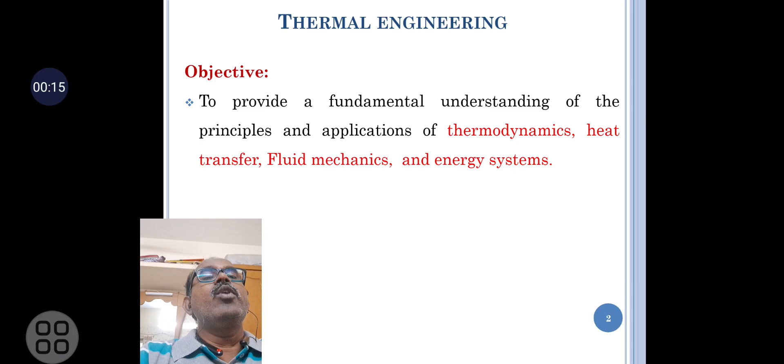The objectives of thermal engineering are to provide the fundamental understanding of the principles and applications of thermodynamics, heat transfer, fluid mechanics, and energy systems.

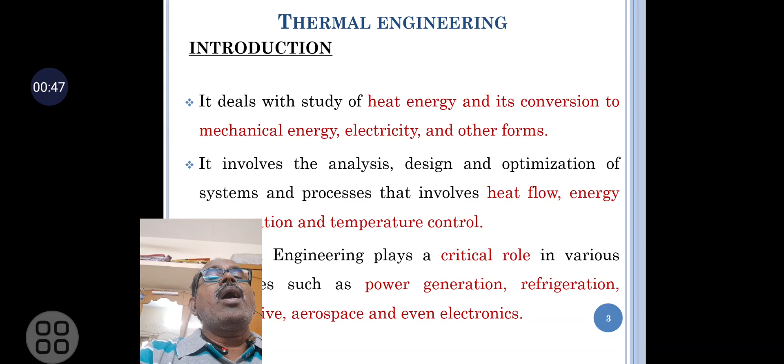An introduction to this subject: it deals with the study of heat energy and its conversion to mechanical, electrical, and other forms of energy. It involves the analysis, design, and optimization of systems and processes involving heat flow, energy conservation, and temperature control. Thermal engineering plays a critical role in various industries such as power generation, refrigeration, automotive, aerospace, and electronics.

The key principles and concepts: the first law of thermodynamics explains the conservation of energy, that energy cannot be created or destroyed, only transformed from one form to another. The second law of thermodynamics explains that heat energy naturally flows from a hotter body to a cooler body, and the entropy of an isolated system tends to increase over time.

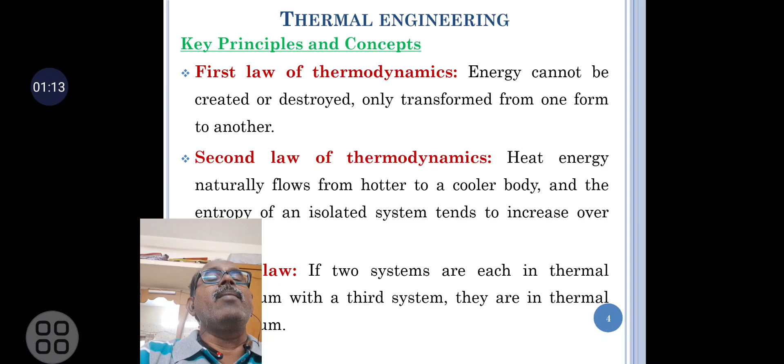Applications of thermal engineering include power plants, where thermal engineering principles are used to design steam and gas turbines, optimize boiler efficiency, and improve waste heat recovery. Also automotive engineering, in cooling systems of vehicles.

Exhaust heat recovery systems, and aerospace heat management in spacecraft, jet engines, and high-speed vehicles. In the electronics industry, managing heat dissipation in electronic components, computer processors, and LED lights ensures optimal performance.

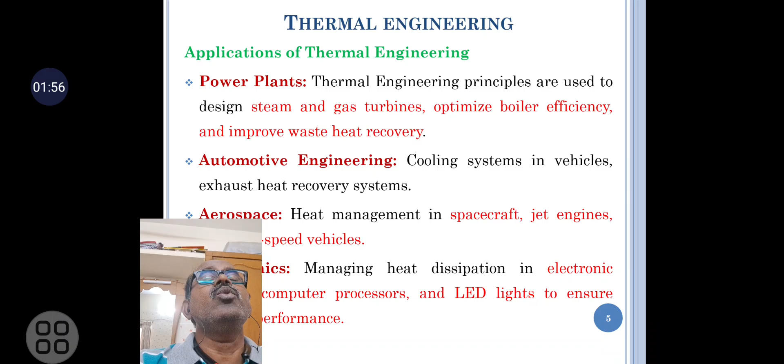Emerging trends in thermal engineering: many research efforts are ongoing in this area. Renewable energy systems such as solar thermal systems, geothermal power, and bioenergy are gaining importance in the context of sustainable energy production.

The government has also taken many steps to develop solar thermal systems. One company, Tata Industries, has invested around 100 crores in solar development systems.

Nanotechnology uses nano materials to improve heat transfer efficiency in thermal systems, like cooling electronics or enhancing heat exchangers, and energy storage.

The development of thermal energy storage systems, such as phase change materials, is used to store excess energy for later use. Thermal battery management systems ensure effective thermal management of batteries and electric motors, increasingly important to ensure performance and safety.

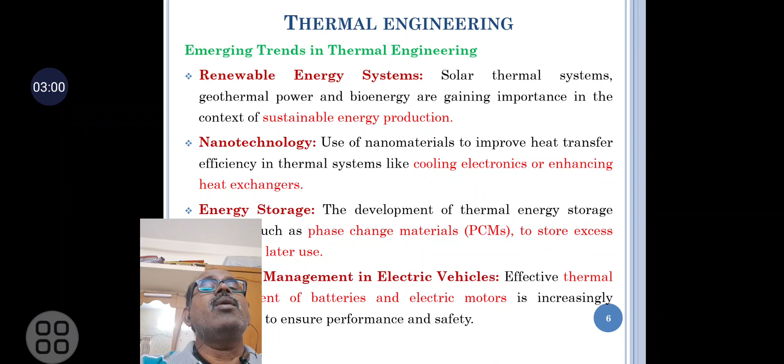In the first unit, we will discuss the air standard cycle. Both spark ignition and compression ignition engines are based on air standard cycles. As air is intaked and heat is also intaked, we get the work output. Next, the heated air is exhausted from the system.

The assumptions of the cycle are: air is used as an ideal working fluid in the cycle, the compression and expansion processes are isentropic, the system is closed, the cycle is a complete thermodynamic cycle, and the specific heats are assumed to be constant at their ambient temperature value.

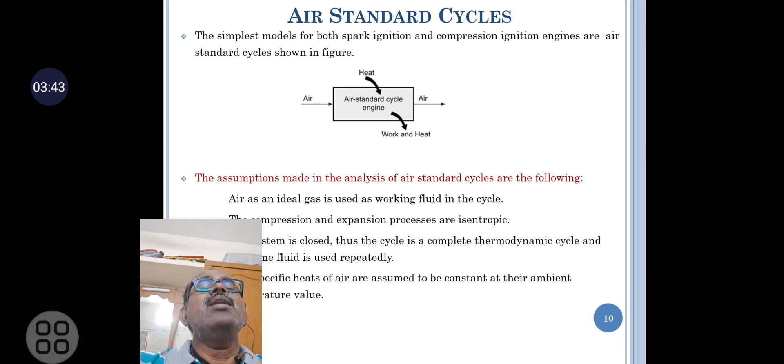First, we will discuss the Otto cycle. The Otto cycle is the ideal standard cycle for spark ignition engines. It was invented by Nikolaus Otto in 1876. The Otto cycle consists of four processes: isentropic compression, constant volume heat addition, isentropic expansion, and constant volume heat rejection.

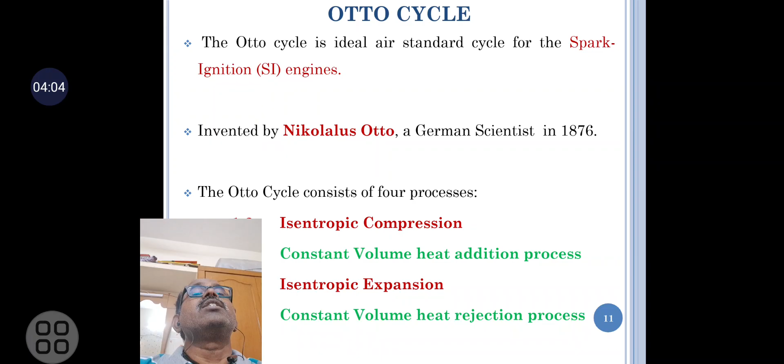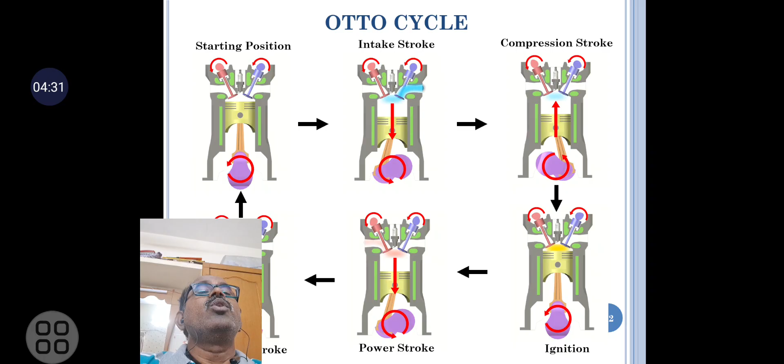In the second stroke, the compression stroke, both valves are closed and the piston moves from BDC to TDC. At the end of the compression stroke, the ignition process takes place, combustion occurs, and pressure and temperature are raised.

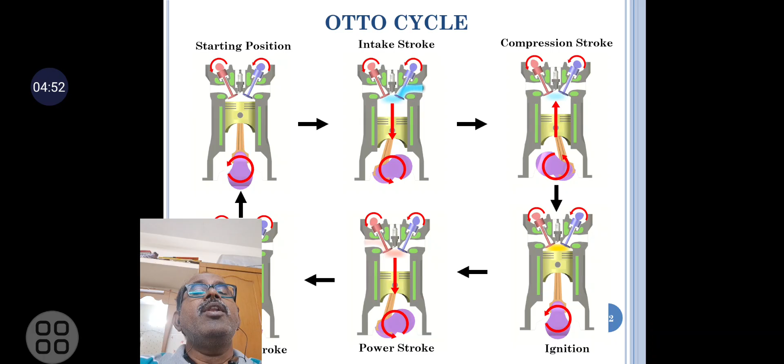The piston then moves from TDC to BDC, which is called the power stroke. After the power stroke, the piston moves from BDC to TDC, and the exhaust stroke takes place.

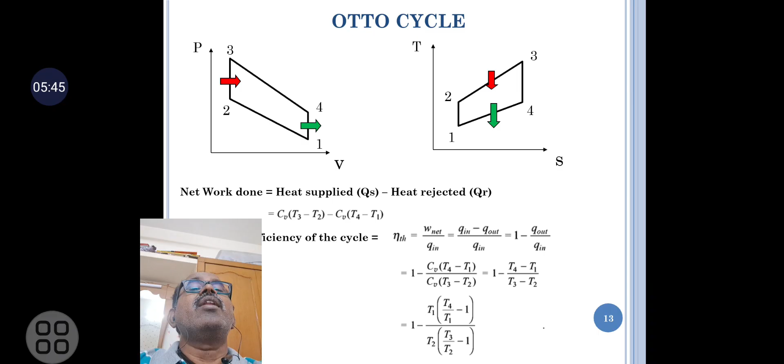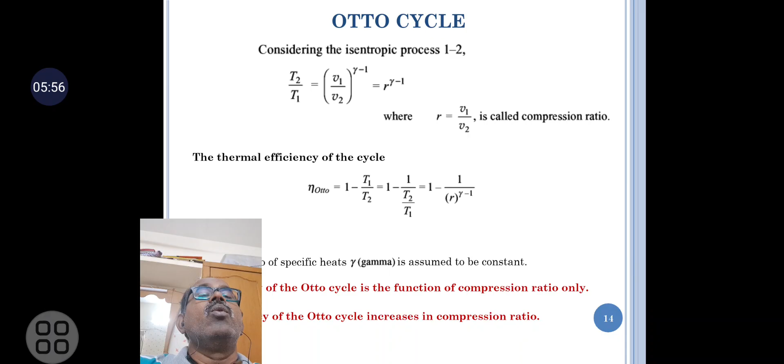Net work done is equal to heat supplied minus heat rejected. The efficiency of the cycle purely depends upon the compression ratio. The efficiency of the Otto cycle is a function of compression ratio, and the efficiency increases with compression ratio. Higher compression ratio gives higher thermal efficiency.

The cycle continues as an effective combustion process among many engines because it provides an excellent power output.

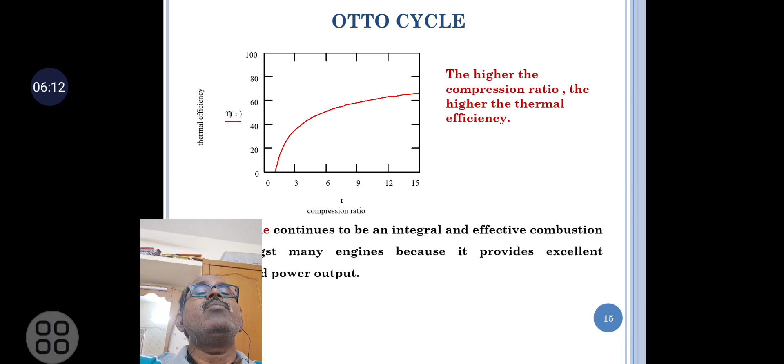Next is the diesel engine. The diesel cycle is the ideal air standard cycle for compression ignition engines. It was invented by Diesel in 1898. The diesel cycle consists of four processes: isentropic compression, constant pressure heat addition, isentropic expansion, and constant volume heat rejection process.

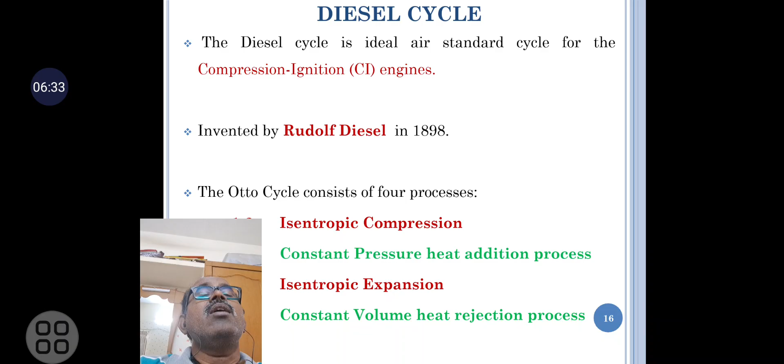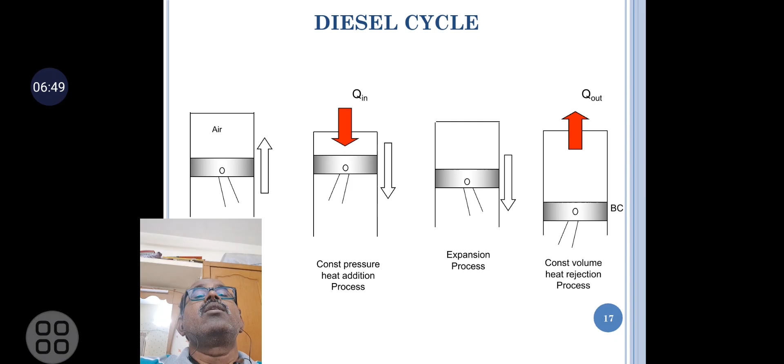In the first diagram, the process 1 to 2 shows the compression process. The second process, 2 to 3, is the constant pressure heat addition process.

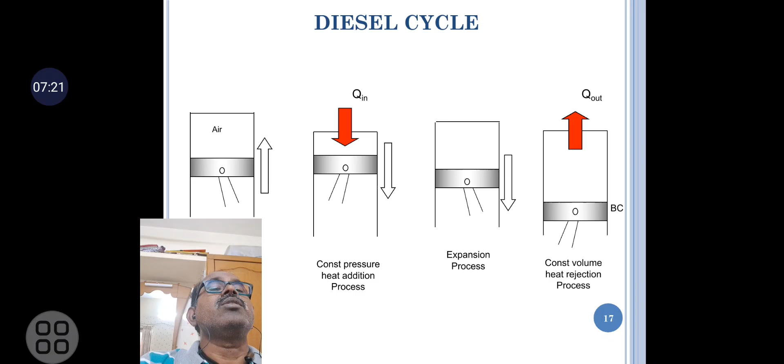In this process, the piston moves from TDC to BDC during constant heat addition and expansion. After that, expansion process takes place. At last, the 4 to 1 stage is the constant volume heat rejection process, where the piston moves from BDC to TDC.

In this diesel cycle, the pressure-volume diagram and temperature-entropy diagram show: 1 to 2 is the isentropic process, heat is added at constant pressure, 3 to 4 is the isentropic expansion process where volume increases and pressure is reduced, and 4 to 1 is the constant volume heat rejection process.

The TS diagram also shows the same processes: 1 to 2 is isentropic compression where entropy is constant, and 2 to 3 is the process where...

Pressure remains constant, and net work done is heat supplied minus heat rejected. Heat supplied at constant pressure process is Cp into (T3 minus T2). Heat rejected at constant volume is Cv into (T4 minus T1). The efficiency of the cycle is the ratio between work done and heat input.

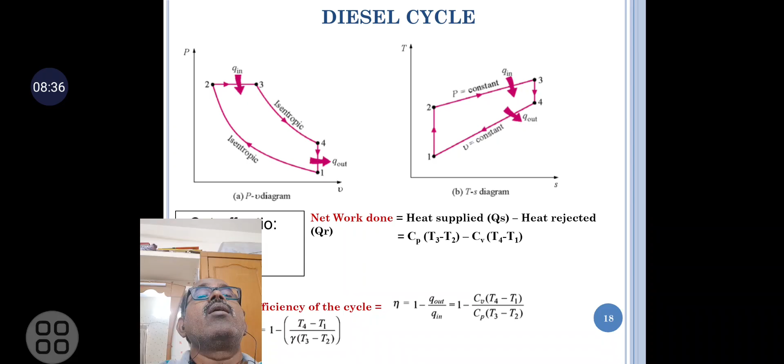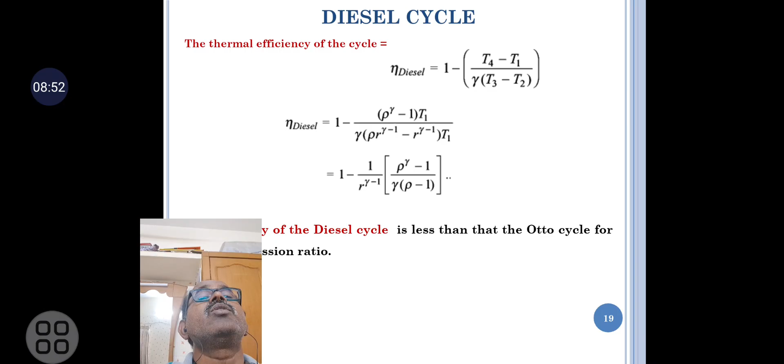In thermal engineering, the thermal efficiency of the diesel cycle is less than that of the Otto cycle. This purely depends upon the compression ratio and cutoff ratio, since the gamma value remains constant.

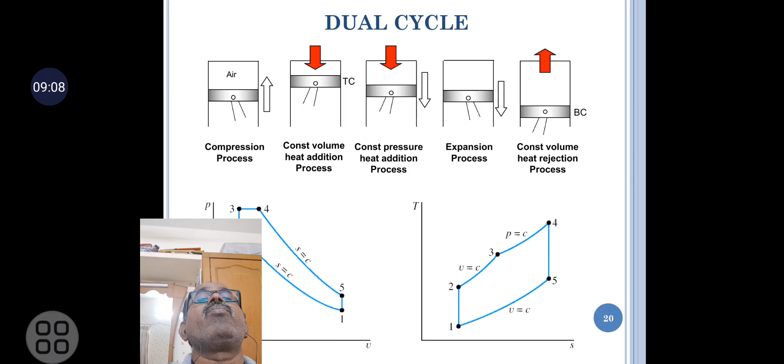Next, the dual cycle. The first process, 1 to 2, is the compression process, during which the piston moves from BDC to TDC. Next is the constant volume heat addition process, and one more process is the constant pressure heat addition process.

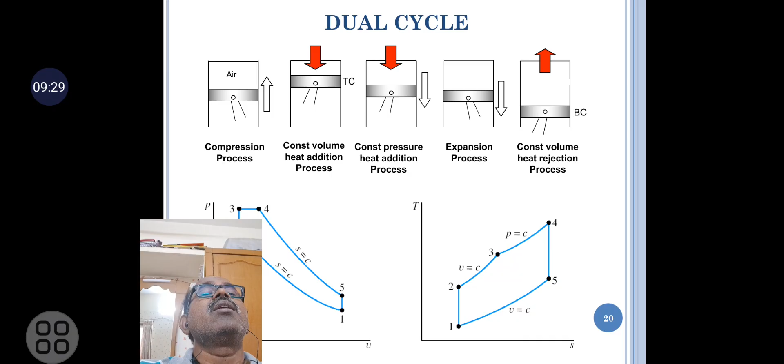The dual cycle is a combination of the diesel and Otto cycles. The last processes are expansion, and heat rejection at constant volume.

The heat supplied includes both the constant volume and constant pressure processes: Cv into (T3 minus T2) plus Cp into (T4 minus T3).

The heat rejection process is Cv into (T5 minus T1). The thermal efficiency of this cycle is the ratio of work done to heat input.

The efficiency of the dual cycle is a function of compression ratio, cutoff ratio, and pressure ratio. For the same compression and cutoff ratio, if pressure ratio is increased, the thermal efficiency of the dual cycle increases. Most modern diesel engines work based on the dual cycle.

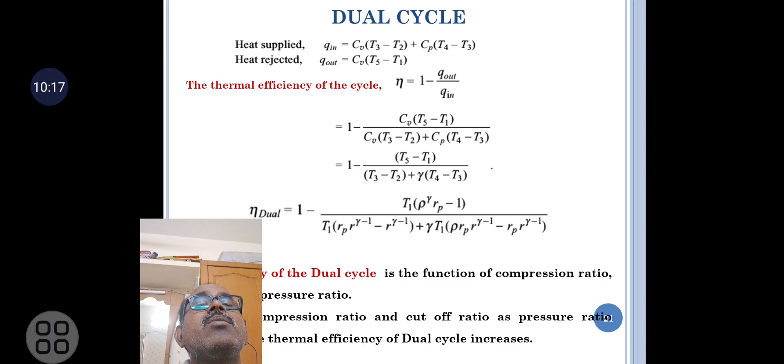The outcome of thermal engineering is understanding and applying thermal engineering principles and heat transfer mechanisms, and the design and analysis of a variety of thermal systems using computational and experimental tools for modeling and analyzing the systems, along with the environmental impact, availability, and importance of thermal system design, and engineering solutions in thermal systems.